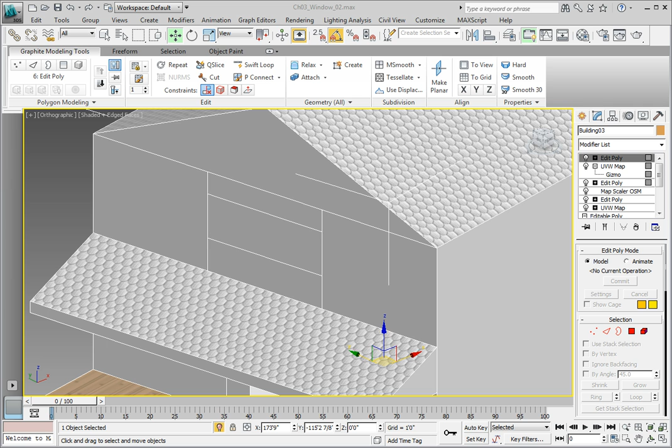The first thing we'll do is select from the Graphite Modeling Tools the Sub-Object Polygon level. Click on the Select Object tool in the main toolbar. To make it easier, click out into space to deselect all the polygons of the building, then click to select the newly formed polygon we'll be using for the window.

This polygon is going to get a different material. Remember, we assigned all the polygons in the building a material ID of 1, so we will change the material ID for this polygon. In the Graphite Modeling Tools Properties panel, click the down arrow in the Properties title bar and click on the Material IDs option.

We might need to drag the window into the viewport. Click on the up arrow of the spinner for the Set ID and increment it to a value of 2. Go ahead and close the Material ID dialog.

Now there can be a different material for the frame. The frame itself will be the same size all the way around the window, so we're going to use a tool called the Inset tool.

We are currently in Polygon Subobject mode. From the Graphite Modeling Tools Polygon panel, click the down arrow next to the Inset option and choose the Inset Settings from the drop-down list. Inset is available to us in the Polygon Subobject level and was not available in the Edge Subobject level. We'll use this tool to begin creating our window frame.

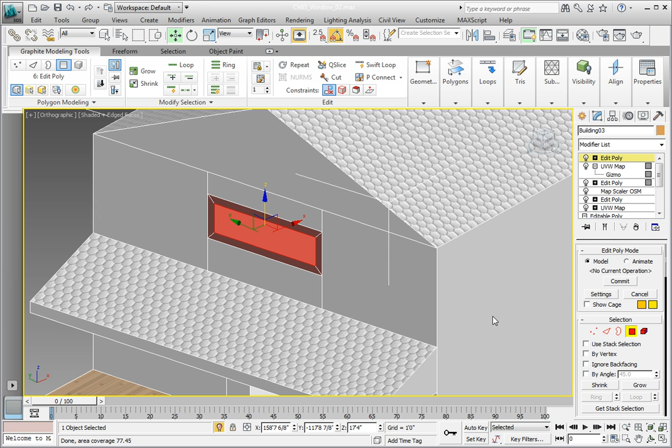Since this is doing exactly what we want, we can commit this edit by clicking the check mark on the caddy. These new polygons are going to become our window frame, and the center polygon is going to become our window sash and glass.

We now need to change the material ID of the center polygon to 3, so we can apply a different material to this polygon. Again, using the Graphite Modeling Tools, click on the down arrow on the Properties panel and click the Material IDs option. In the Material IDs dialog, increment the value of the material ID by 1 to an ID of 3.

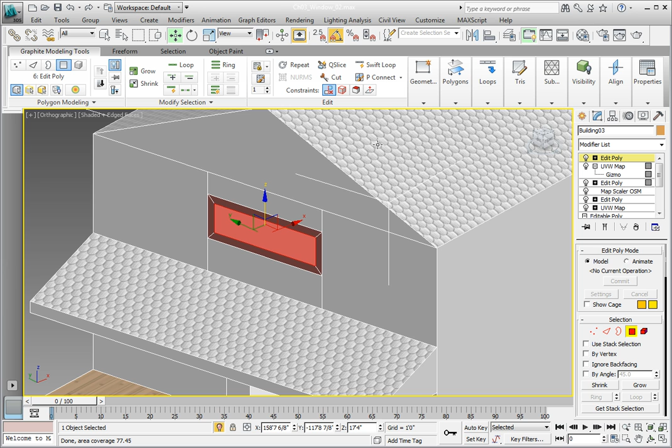Now let's start to detail the window frame a little bit. We're going to start by using the Extrude option. Again, in the Graphite Modeling Tools Polygons panel, click the down arrow next to the Extrude option and select the Extrude settings from the drop-down list.

By default, it extrudes out by 10 inches, and you can see it also creates new sides all the way around. We don't want a height of 10 inches, we want -3 inches. In the height type-in, enter -3 inches, making sure you use the inch mark, then press Enter to make sure it looks okay.

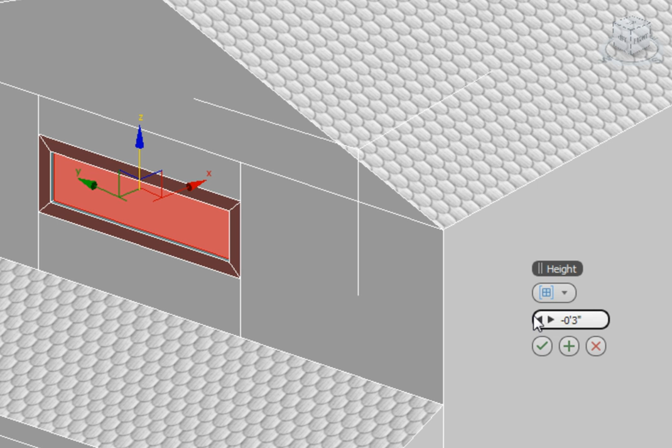Then we'll go ahead and click the check mark to accept this edit. That pushes our polygon inward a little from the edge of the window frame. This is the sash element that we're building.

In the Graphite Modeling Tools Polygon panel, select the Inset Setting options again. Change the value in the amount to 3 inches this time, and press Enter to accept the change.

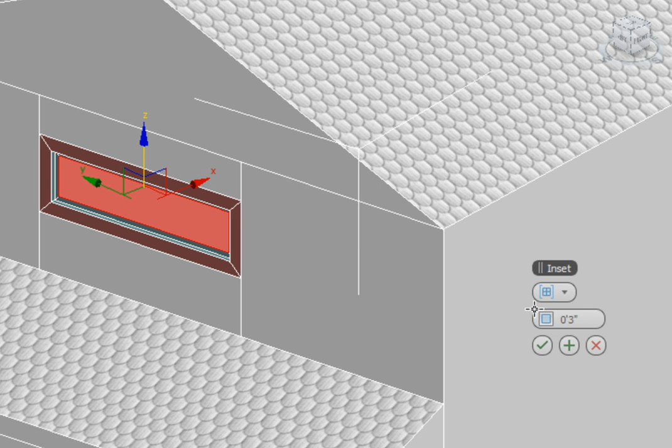Notice we didn't give this value a negative, because this value is only offsetting the polygon inward — positive numbers offset this value inward. This will be our sash rail. Click on the check mark to accept this operation.

This is now an object with 3 material ID numbers: one for the overall building, a second for the polygons that will become the window frame, and a third for the sash rail. We'll increment this version of the file.

Click the Application button, select Save As. In the Save As dialog, click the Increment button. Again, if it asks you to overwrite a file, go ahead and overwrite it.